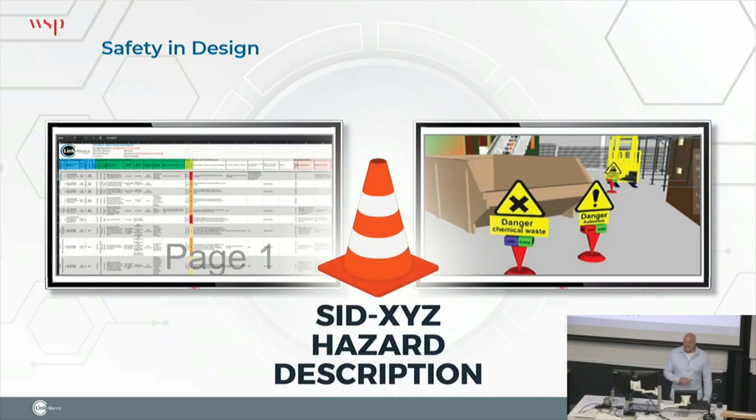So the reviews came from a number of sources, including the BIM models. Potential safety hazards were captured in 2 methods: the SID register for inclusion in design reports, and also within BIM Track using unique ID numbers as well. So we had a 2-pronged attack at catching safety and design issues.

In this one, we ran a sandbox and had this working for one particular discipline for structures. We didn't manage to incorporate this particular initiative across the entire project just due to time constraints and scalability on the project, but we did have this running within some various teams on the project.

So we set about bidirectionally linking the SID register with model components. In this case, it was a Revit family that was used to identify that also appeared on the drawings, and we had a 2D and a 3D element that was able to be identified on all of the design drawings as well, which bidirectionally linked to the register and formed part of the report.

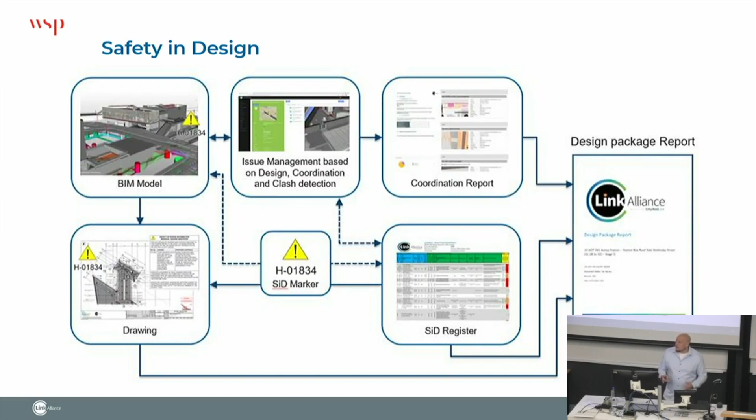These were used in coordination meetings to make sure that we were able to identify and communicate these to site. There was various means of getting to the site. We'll cover some of that a little bit later on in the presentation.

All right, the next one. I like this one - this is about signage. There was no standards for tunnel signage in New Zealand, so it didn't exist. So to do this, we used the BIM model, and from a lot of various sources.

I like this one because I actually got to do some modelling for once, which was quite nice. But effectively, we got various standards from Australia and New Zealand, put them all together, and then made these models. We were able to configure them and then get the models out to various teams and approvals through all the different boards and things that were involved. So we could get some standards, and these form standards now, and we can get approval to make sure everyone can get out of the tunnels in a state of emergency.

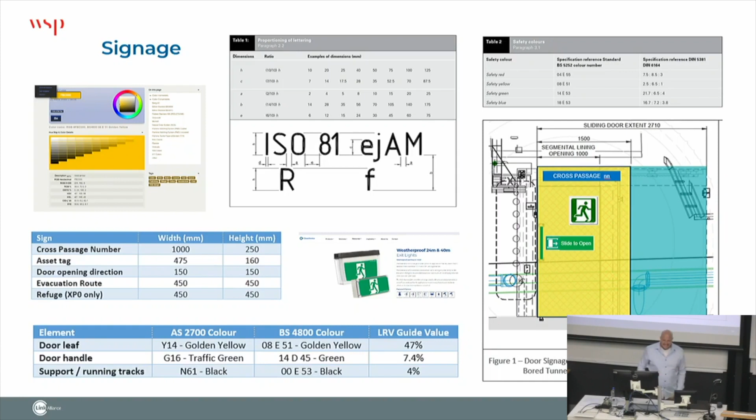So these are some of the models, and you can see - we had to put these together and basically work out sizes, shapes, colours, fonts, everything, and make sure that they were able to be understood and make sure they were going to work once we actually constructed the thing, right?

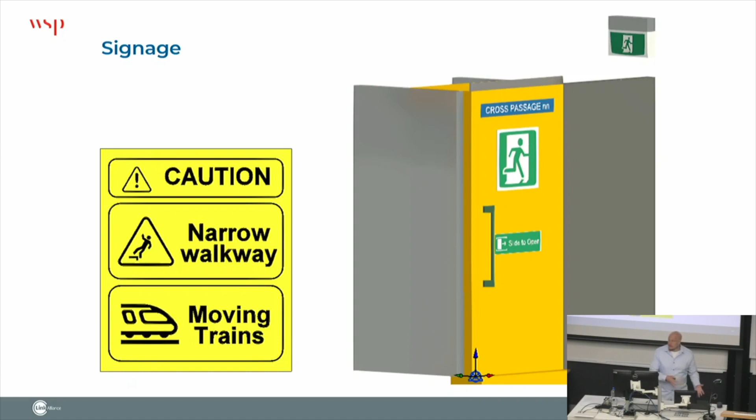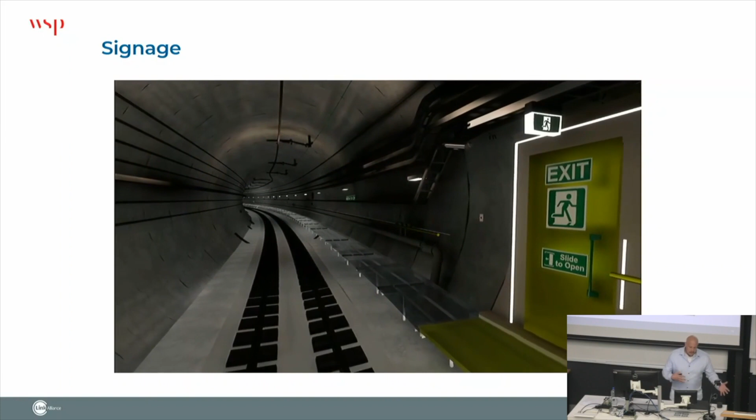So to do that, is it going to play? Did it play? There we go. We then, once we had the models, effectively we made visualisations, and they went out for approval as well. So it allowed people to engage with the various models and make sure they're happy with the colours, make sure that there was enough yellow that everyone would be able to see it when they're walking down the tunnel and things like that.

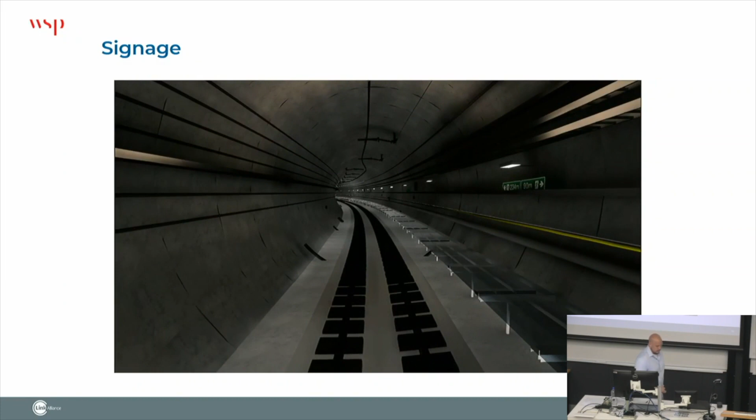Our next example is the noise enclosures. It was really important to space-proof these because we're working in the CBD, around moving traffic, moving people, and big cranes. Being able to put the cranes virtually inside the noise enclosure and look at where that affected the other buildings and everything else was really important.

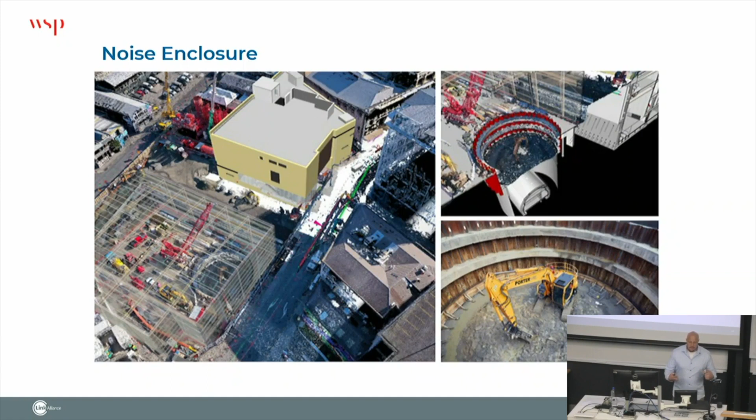That allowed us to do accurate spatial modeling, and we combined point cloud with the BIM models, effectively allowing them to work out exactly what the noise enclosures would look like.

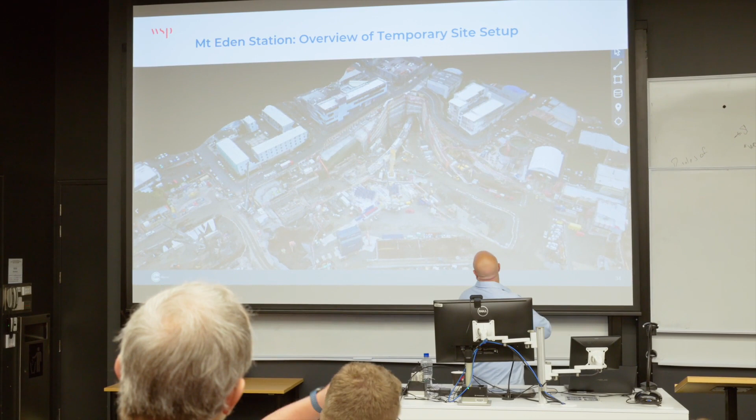What we have here is a point cloud capture of Mount Eden Station. This is where they launched the TBM tunnel, Dame Whina Cooper. It's a pretty big, complex site. These waler beams are the size of like two people — it's pretty crazy on scale, size, and shape.

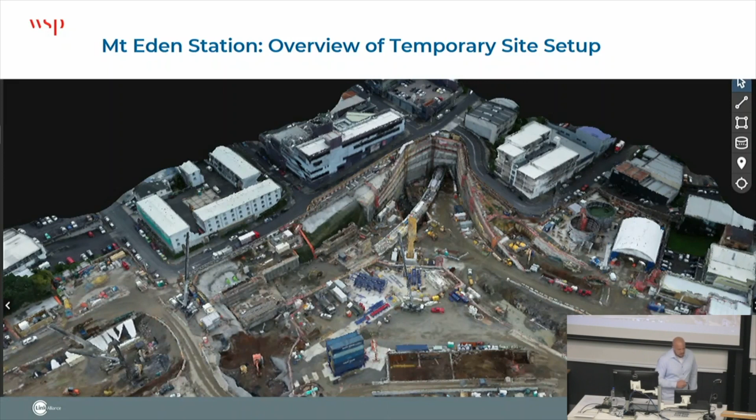You can see a lot's happening on the site, and we had to figure out how we were going to stage it. To do that, we effectively used the BIM models so that we could plan, stage, and phase all of the construction.

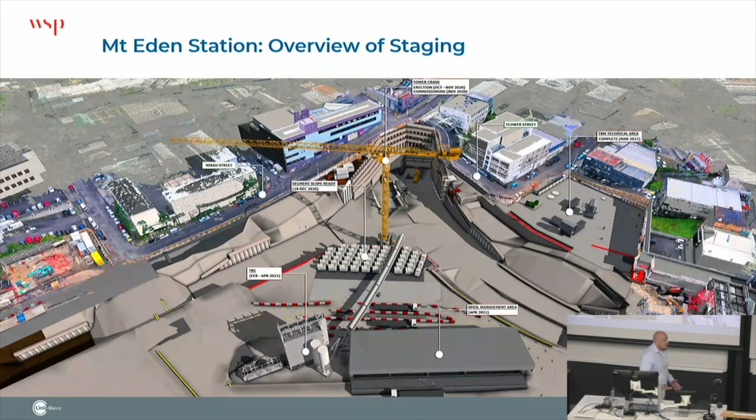So an accurate representation — you can see here the point cloud capture going around the outside. These are all live streets, so all of this excavation had to happen while cars were still driving on the streets, and you couldn't have anything fall over, otherwise big problems.

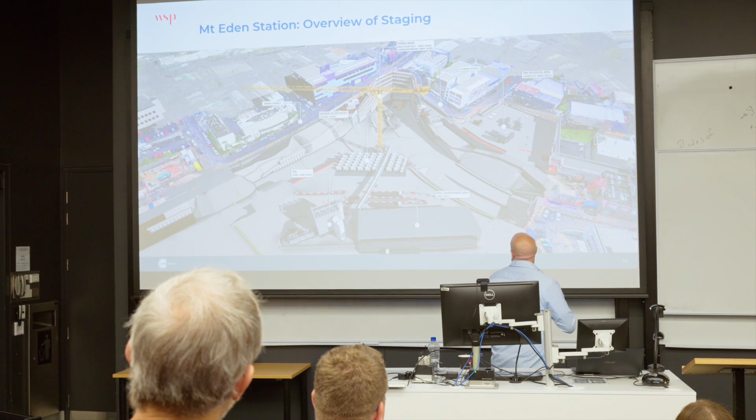We were able to use the models and the point cloud together, with accurate cranes and things, to make sure everything was arranged correctly on site, and to limit the amount of risk to everybody while all of these massive works were undertaken.

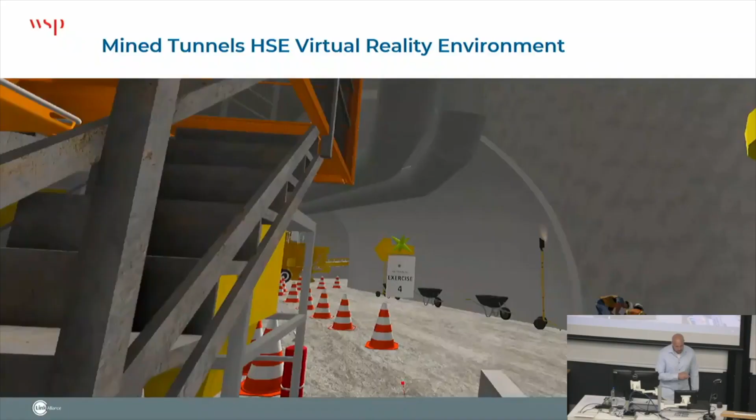This particular scenario used virtual reality. Oh, I've got sound effects.

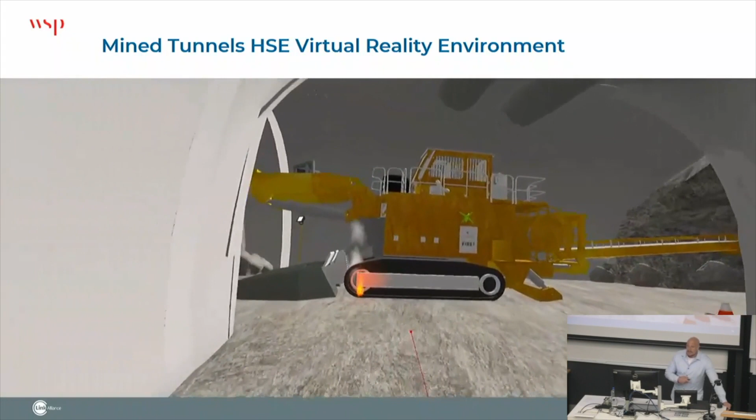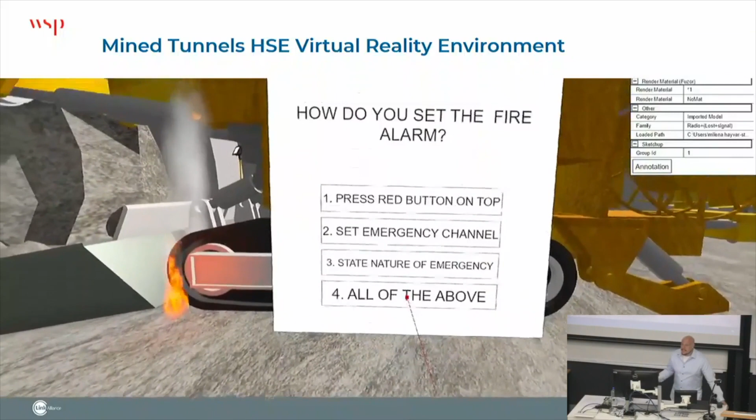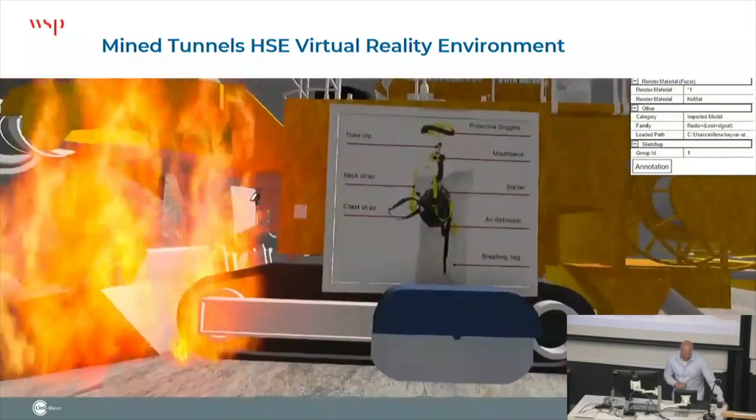So this cut down a lot of the need to do on-site training — at least you know what to do once those alarms go off, right?

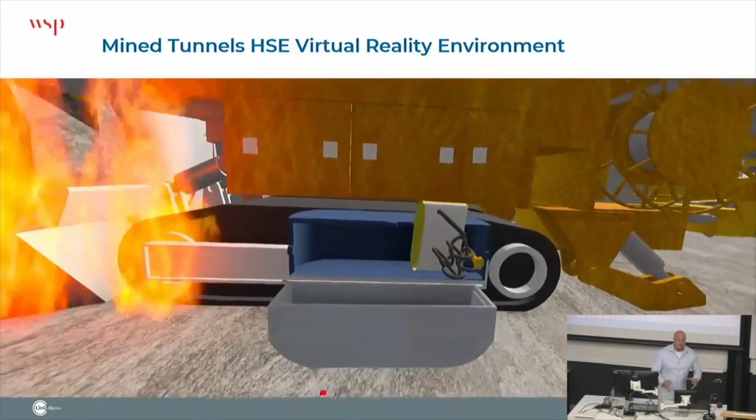So we're able to use these to induct people before they got to site, instead of trying to do the inductions in the tunnels on site. This was a really big jump forward, and these VR sets were available in all the various site offices wherever the tunneling was happening.

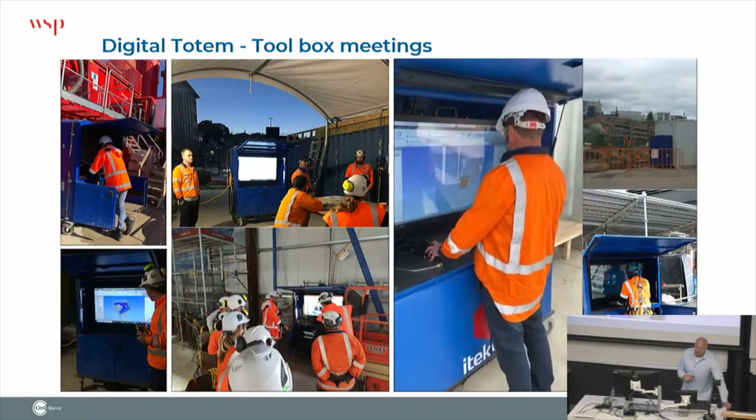So the important part here is no paper drawings — you can go here and actually interrogate the BIM model, getting access into, I think we're using Aconex, to all of the latest drawings, all of the information, as well as the safety and design registers.

The markers, all of these things are available on site, populated at each of the stations and used for toolbox meetings and various other uses — 4G enabled Wi-Fi on site for the team. And that is my presentation.